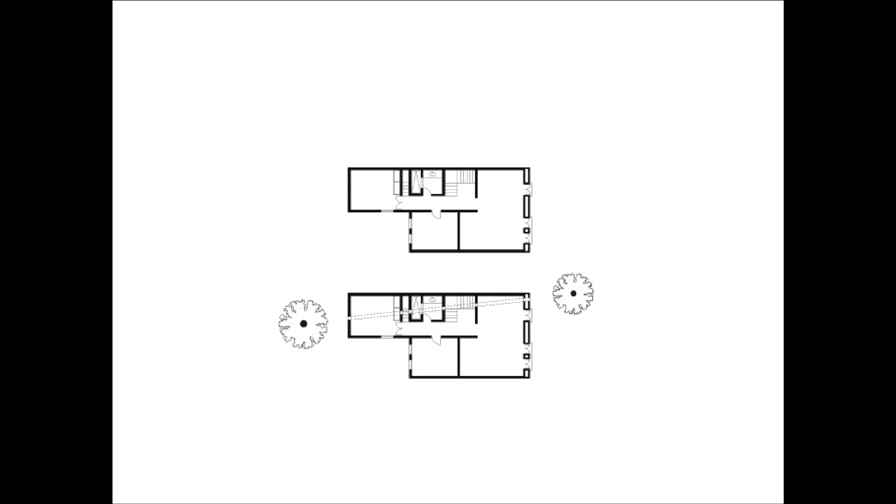In this case, we are showing you a piece Mauricio did several years ago. The intervention here was just this hole which crosses all the different walls along the house, meant to make a connection between two trees on different sides of the house.

What's interesting about this piece for us is that along this space there was a visual connection between one place and the other. For us, architecture has to do with voidness, maybe not doing a lot but taking away, and having a provocation behind that — in this case, along the journey of the exhibition, you could see people in other rooms.

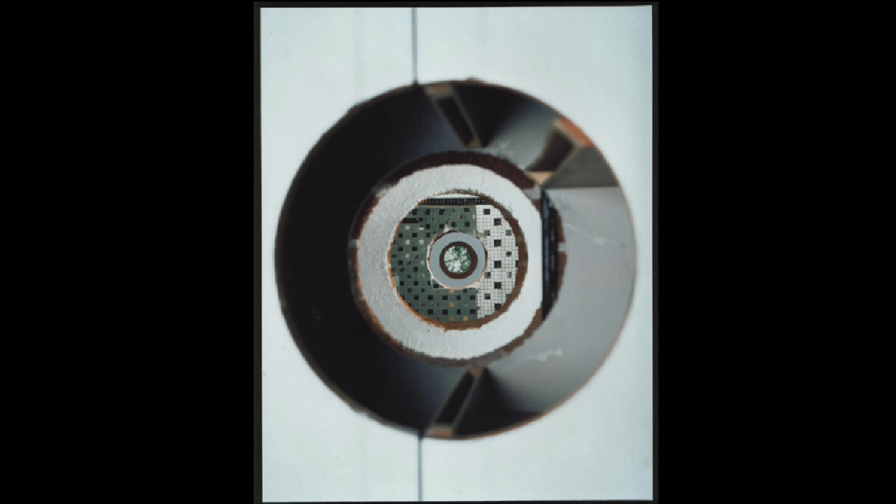You could see along these different spaces and then see the people again in a different situation. That was really interesting, because even a bathroom was part of this intention — you could go to the bathroom and no one could see you. The situation was a provocation through doing nothing.

So I think this is a very important theme in our work — doing this ephemeral work and then trying to connect it to the architectural theme.

We made a school for blind people, and it was a great opportunity to make something without view, to work with the other senses. We had to make a public school without much money, in a very poor area in Iztapalapa, Mexico City. We had land to build the school, but we had a problem.

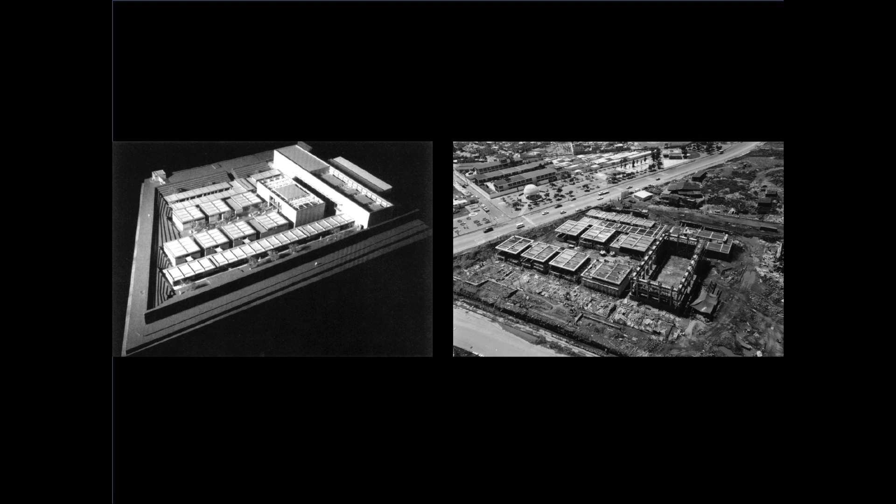We make a model with sentido común, with common sense—the way that blind people can really walk between many parts. I wanted to have some experience with you because when I made this school, when you see the model, you might say maybe it's not that nice. But when some blind people from Spain came to put some products for us for the school, he began with his finger, walking the model with his finger, and began to talk about the spaces, the volumes between the squares, the patios. That was nice for us because we said, okay, we are in the right direction.

We decided to use materials from the place: volcanic rocks and tepetate. Tepetate is some land that you can use like a brick, and it's not that expensive—the idea is how you can use it contemporarily. And then, because in Mexico we have a good climate, you can make patios, a big patio in the middle with a line of water and a library.

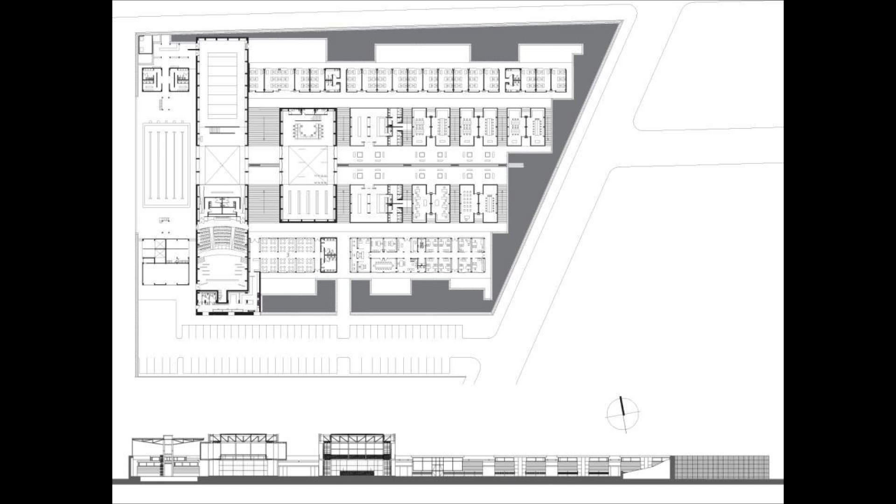Finally, we have the experience with touch, with the feeling of temperature, and that's why you see all these materials—concrete, tepetate, volcanic rocks—and how you begin to play with the height of the roofs. You have to know that all the blind people in Mexico are more or less visually able to sense light, so the light and shadows, everything is important to play with. We made this big square patio with the sound of water, with the shadows of the magnolias, thinking not only about the view, but more importantly about how you will feel in the place.

Because of that, we began to think: if we make a structure like these two buildings, you have a skeleton, 9 columns for each roof. Sometimes you have a skin of tepetate that makes all these workshops, because you don't need a window—so you only have a window at the top, and on the other side a big window because it's a mixed place, like the store of the place, the gallery, etc.

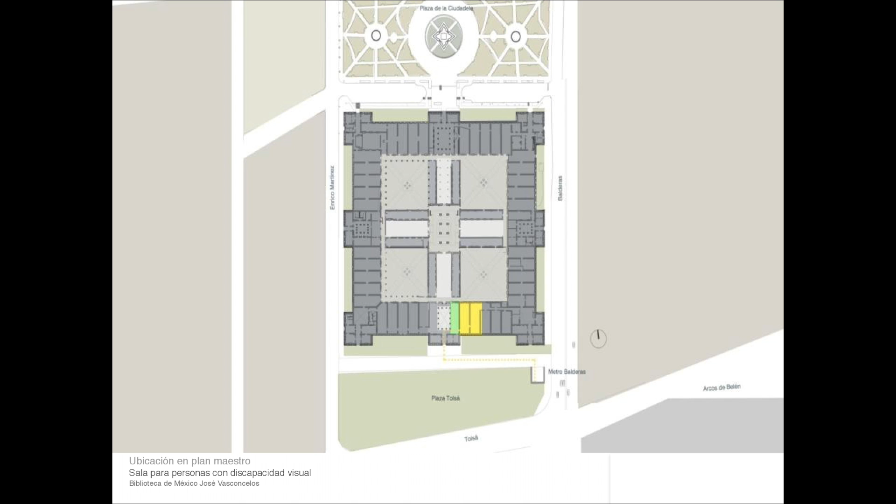Last year they invited us because of our experience working with a school for blind people, to work in this library. It was a big complex, once one of the biggest libraries in Mexico, and they gave us those yellow squares to work in. The building was old, and in Mexico City we work a lot with these old buildings, which are protected by an institution called INAH, so you can't touch those buildings.

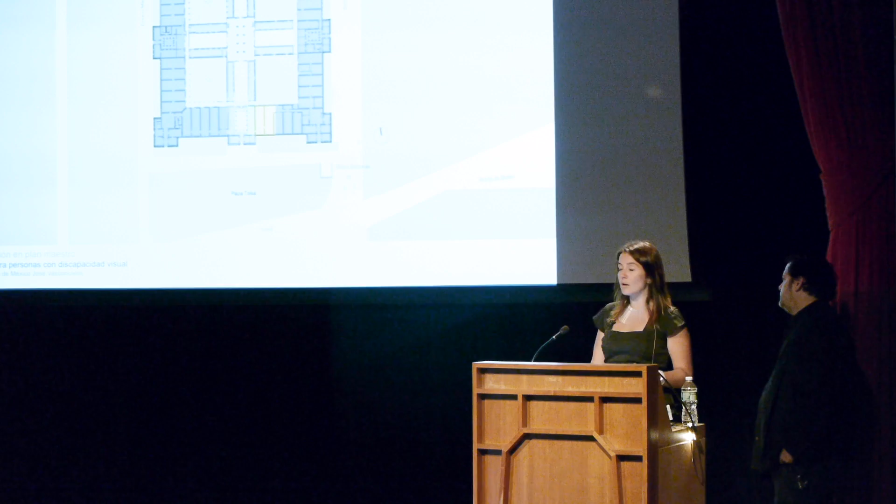What was interesting was that the invitation came because we already had experience working with the theme of blind people. When we found out how the library used to work, it was like a common space, similar to a regular library. In this case, what they asked us was a typical program of shelves, tables, and some small cabins for all the sounds produced in a library for blind people.

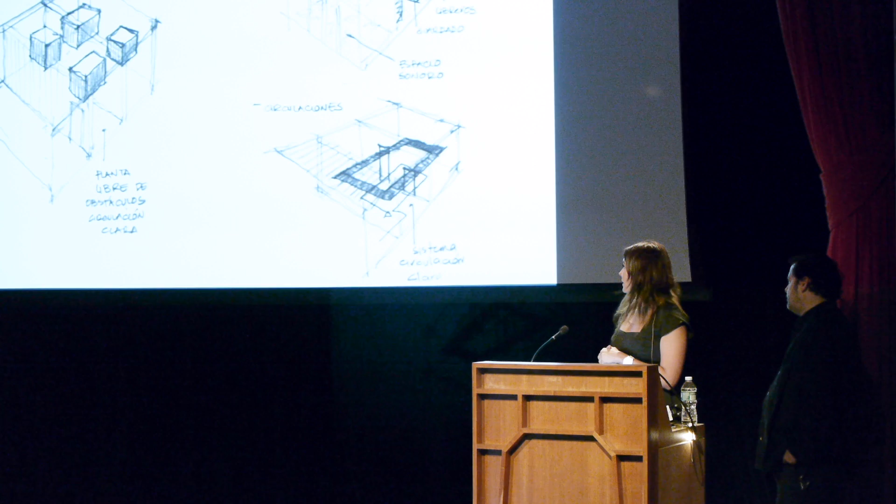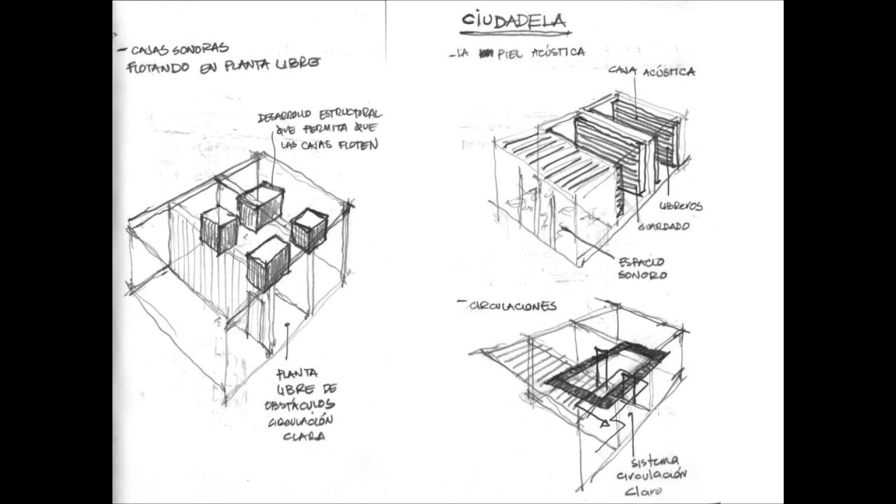What was really interesting in our concept, keeping up with this idea of voidness and working with all the senses, was that we worked with sound as the theme. So we created this big acoustic box, developed very clear circulations, and achieved a clear area on the first floor, then kept the biggest, noisiest sounds in small boxes floating inside, taking advantage of the big height of this old building.

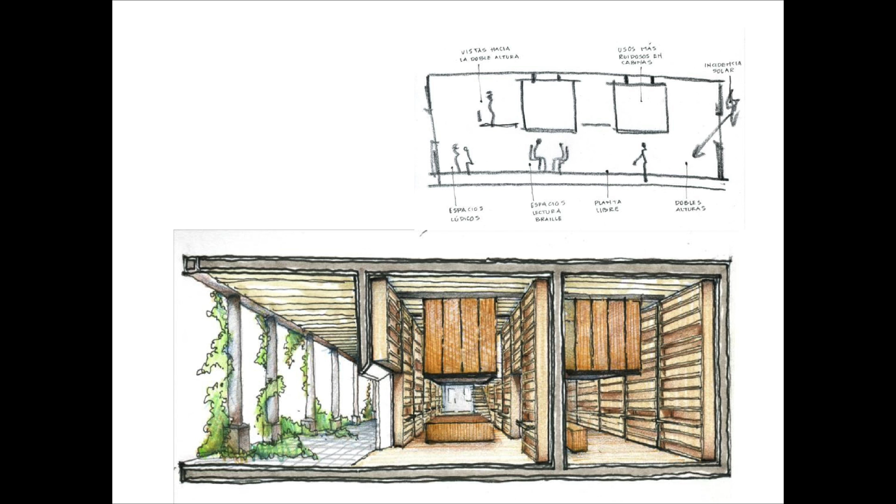We again took advantage of a nice portico in the building and tried to work with the smell of plants, creating part of the program that wasn't originally in scope — a big site to keep all the files safe. In Mexico, jobs are very badly paid, so they have a lot of people reading the same book many times, instead of having this big archive where they can save it and use it until the end.

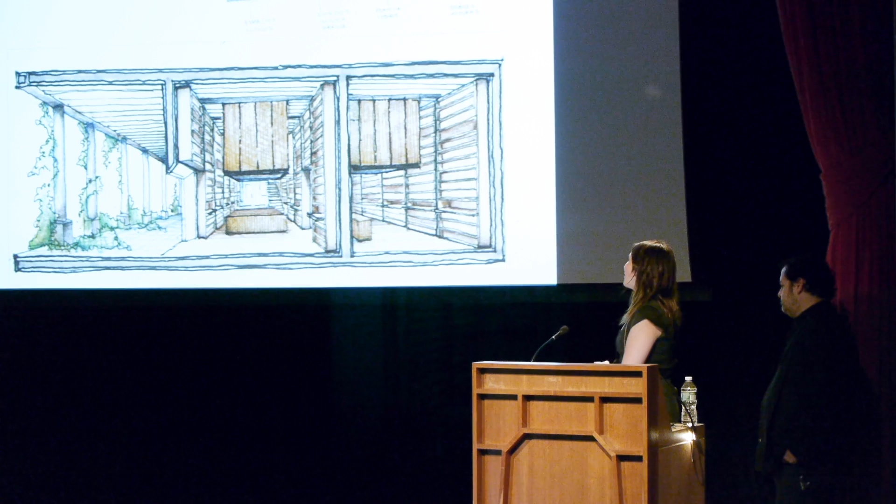So we have these three different spaces. First of all, we worked with the smells — in this case we have a nice garden. Nowadays it's used in different ways: they have lunch there, do tai chi, play chess. We designed it so you can be near the smells, as the first point of being and feeling part of this new experience of the senses.

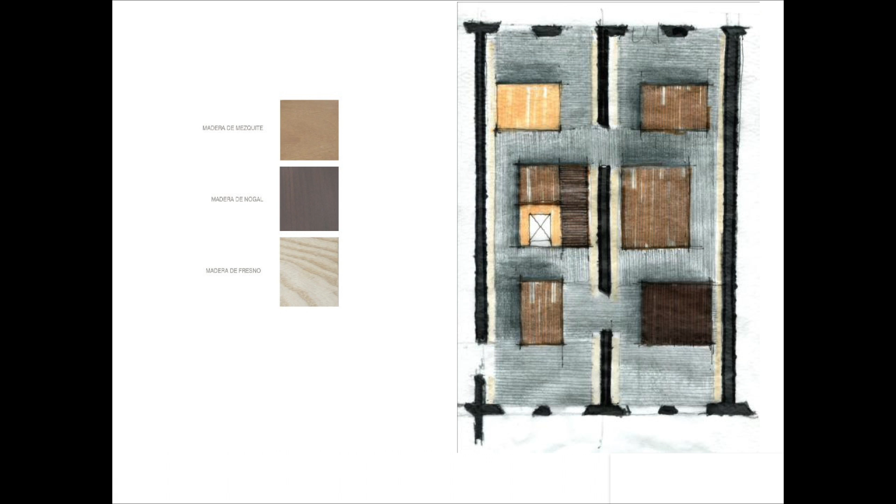Then you get inside the library, and there's this kids area, which wasn't there in the beginning. Here you can see the boxes floating over this area. We also decided to create different textures with colors in different woods, so each color shows you, and the drawing on the floors shows you where to walk and where to work.

One of the colors best seen by blind people is yellow, so we used yellow everywhere. We also put different signals in Braille language, with texts from books talking about senses. Here's one of the rugs, which was also yellow. We designed all the furniture with an industrial designer, and everything was conceived especially for this experience of hearing.

This place was all open, with no walls, and we designed a very sophisticated sound system so you can hear no further than a meter, and in different places, as you keep walking you discover different sounds — the architecture was part of that. We designed different levels in the ceiling so they could also be a reference point for blind people.

Here you can see the interior of these cabins with very sophisticated equipment. This is a drawing we did because we invited some artists to work with sound, and they created pieces especially for this space. What's most interesting about this space is that it's a common place for people who can see and who cannot.

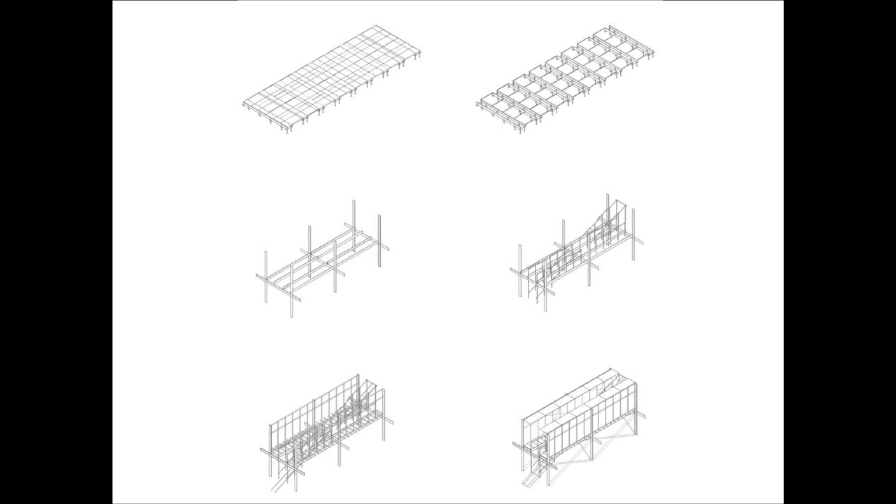This is another intervention in a historical place too. They invited me as an artist just to make something, because they wanted to redo the floor, since this church has issues from the lagoon problem in the center of Mexico. So we counted all the materials we had available, just to know what we had — we didn't have money, just the workers of the place, and with that, in two weeks, figured out what we could do.

I saw before in that place many pieces of art with problems with the scale of the church. So what we did is make a space into the space, working with a structural engineer, using only 6 columns to create a place where 70 people can be inside, having a new experience, and even some artists can make something inside our piece.

As Mauricio said, we are very interested in working with the skull and at the same time with the skin. That's why this is like the reference of how we first worked in an ephemeral work, as the one we've shown, and in this case with a public warehouse we need to do in Milpa Alta, which is very near the heart of Mexico City.

And the way we found the place was all of this. All these constructions which keep on being created, and we have these nice tones, and we plan to work with that material.

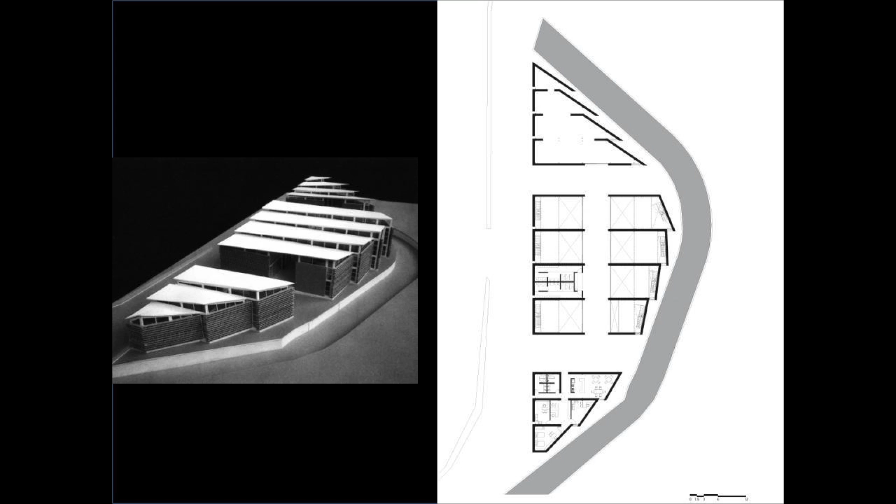Our site was very special because it was like a kind of river around our site. So we designed this building thinking all the time about showing, using very cheap material, which will be this very thin skull of steel with very light ceilings.

At the same time these stones, which will be the scheme of our project. We love this kind of picture, because our user, the one who uses this space, is all these materials which they put all over around.

This building was intelligently designed because all the windows are open to the north, which is very good orientation in our city, so you won't have a hot climate. And as our views needed to be controlled, we opened these little lines.

We like to show this because it's the way public buildings work. At the end, the light is very good, and the natural ventilation functions pretty well.

I think this is one of the most important images of what we think of architecture — this theme of the skull, and at the same time the very light material, but at the same time the skin, which seems to be very strong. The light, the different heights, and that game with the space is what we want to achieve in every one of our projects.

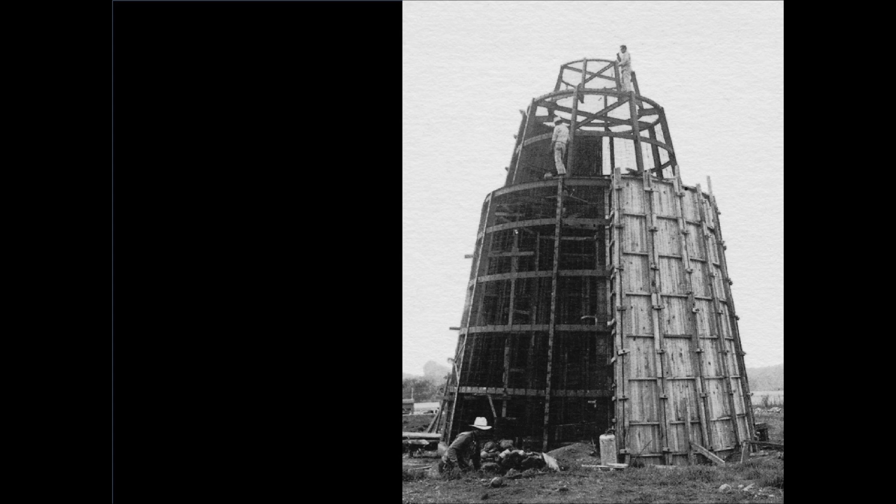In this case, another intervention is in the sculptures we made for the Olympic Games in '68. They invited sculptors from many other countries. This was Fonseca from Uruguay, and what I liked about the photography is how he made his sculpture with all these woods.

So we said, well, we can use all this material to make something — not just a sculpture, but at the same time a big stair that the people can just walk inside the place.

The nice thing about this piece is making a concept, a strategy, because in this case we had the model, we had two workers, and said we need to make this thing inside. But we couldn't cut the pieces because a construction company gave them to us for two months. So we said, okay, don't cut the pieces, but we have to make this.

So in 2 weeks, once more, we made all these stairs, and the final decision was left for the workers. What's nice is that it was very strong, the lines of what was happening there — to understand that the details are more about how you use the material, the time, the money, and the circumstances.

Again, with this connection of the ephemeral with the architecture, we designed a market, also near Mexico City, and it was again a strategy. It was very easy to see how the markets work, with this common sense, how they function with light and with wind, and they're very clean all the time because they feel good.

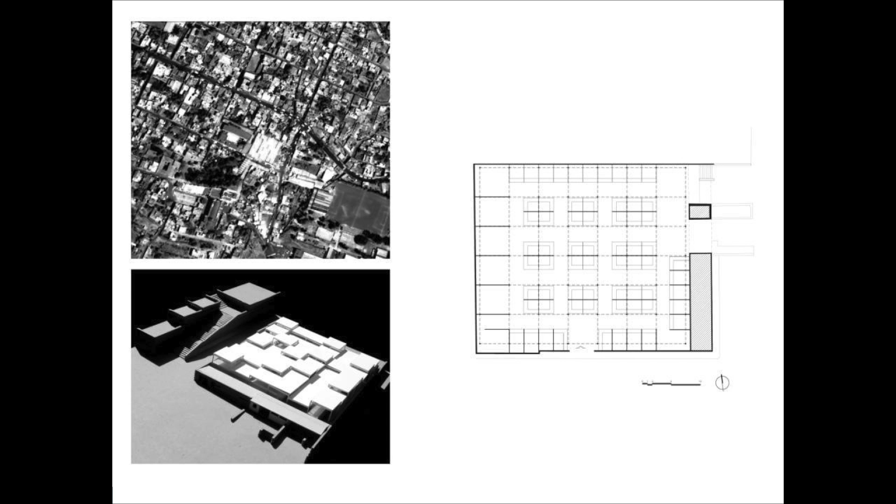And it's using that common sense that we decided to create this grid and work again with randomness, and play with a strategy to create these ceilings at different levels. Every time we placed a piece, we imagined, depending on the orientation, using louvers or crystals.

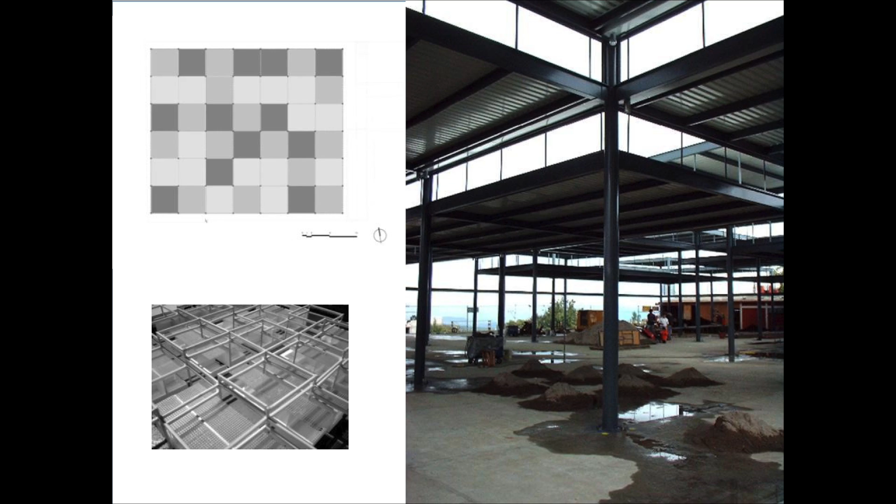So it was meant to be very monochromatic, very clean, taking advantage of the natural life of a market, letting users make it their own and take advantage of the color of the tomatoes and the piñatas. What persists in all these images is the light, and at the same time the dialogue with the city, with the volcanoes, with what happens in our country a lot, this growing of cities without any order.

The idea is, if you have it in a marginal zone, we love these informal houses and cities where everybody's changing the houses every time. They move and change and make other floors, everything is changed. So if we make a contemporary piece there, we try to make something in the same rhythm, so the facade works with what is happening in the whole town, and we want to work outside and inside the same way.

All the products, all the people changing every time, so that's why we try to make it like a tianguis, these street markets we see in all the countries. And what we can do now is just have the wind cross and have the light only in the north and in the east.

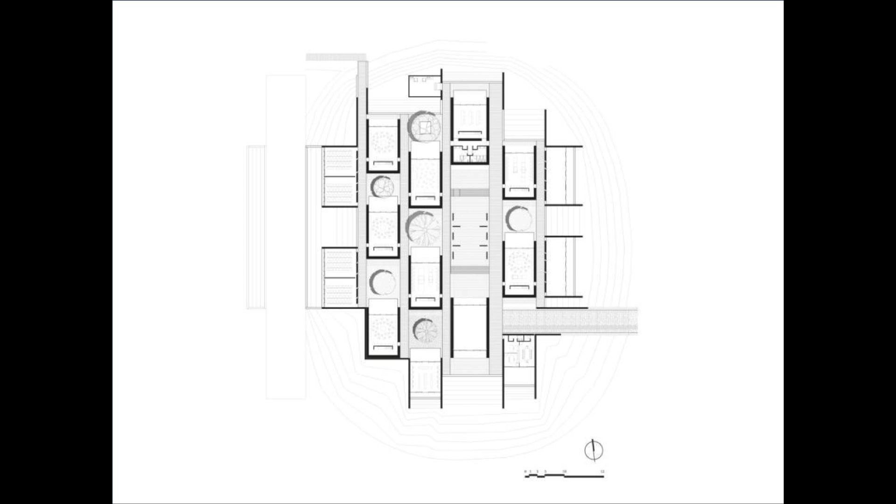And all this in the program we found, if we have like a chess, like a table chess, the blacks are the studios, the whites are the patios, and then how can you make a double space? Because in Mexico we have very good climate, so what can we have in the same space, so that all the sculptures, drawings, whatever you have in the program, can have their own spaces inside and outside? What's very important for us in architecture is that the spaces we create should be discovered at the same time.

The timeline, you walk through the space and discover every space should be very important. In this case, the chess plan helped us discover every courtyard we created, and as Mauricio said, to get a bigger studio but with less money, because half of it will not have a ceiling.

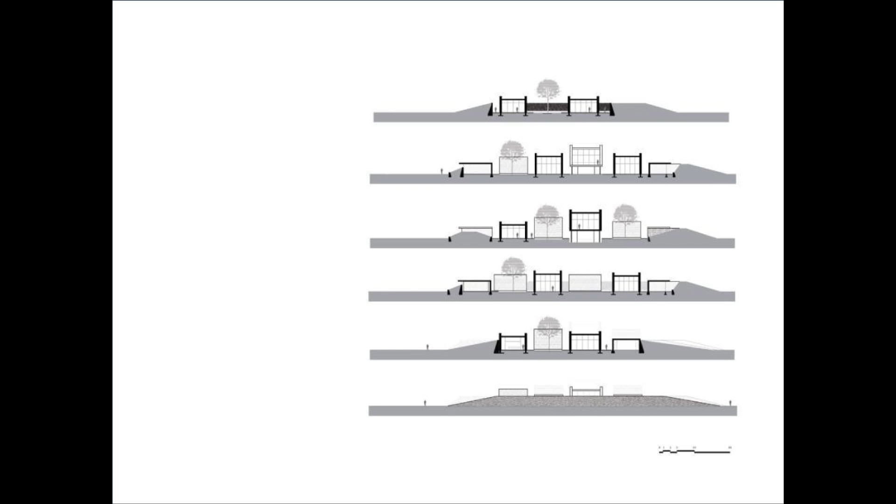I think what this project shows is that the chess plan helps us move through the place in different ways. Also, the program is very flexible, so you can walk through the studios without them being a closed classroom, and that helped. We also wanted to work with this curve form so you can start to discover the different heights of the buildings, and every studio has its own different height between one and the other, depending on the program.

So here we can go image by image, how we came with the earth, how we can make some stones with the earth and the humidity, and then in the middle, these earth walls that we made in all these buildings. Even because we don't have all the money, it's a way that if we have different places to work at the same time—first, because we had to make this school in one year, and on the other hand, because they needed to go up for the money. So they began with 3 buildings, and then the people said, okay good, then you can have all the money.

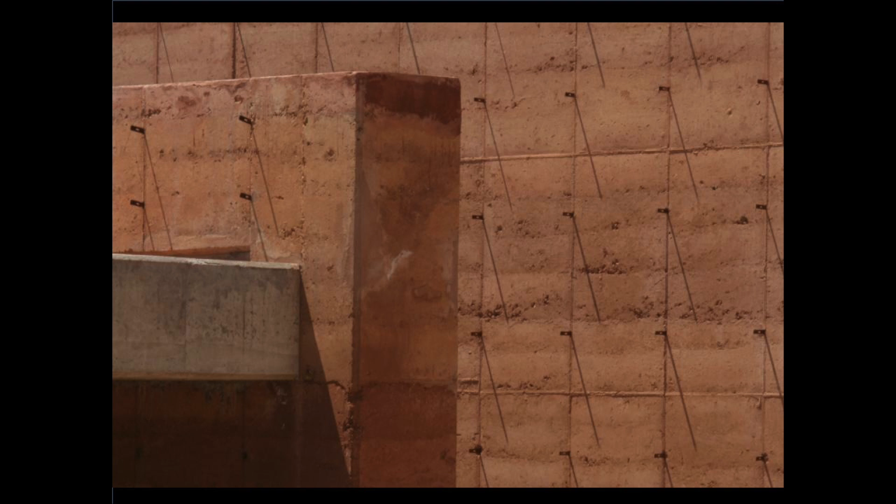So how can, with architecture, we help the client get what they want? Again, it was a strategy to achieve all this site and make it part of our project, and without, as Mauricio said, having all the money, which we achieved at the end, but not all.

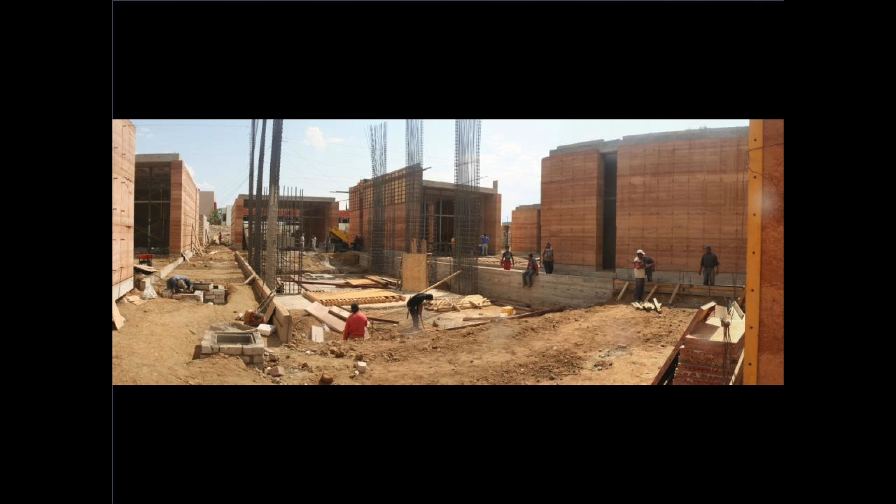We have 2 different stages instead of the 3 that we designed, and here is part of the progress of building one of these. What I like about this building is that we made walls of rammed earth going to the other side—talking about gravity and how we can do, one more time, things with the same materials, which is heavy, but at the same time we make a kind of deconstruction to do it in another way.

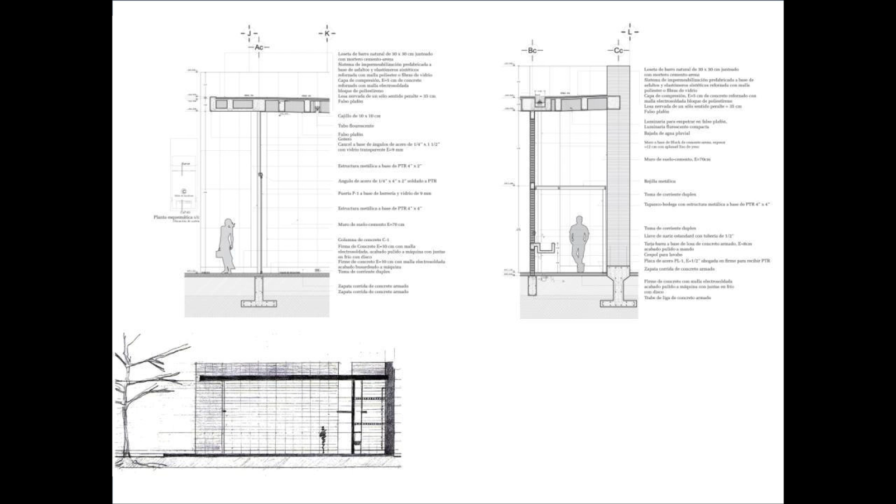You can see boxes, but finally we are not working with boxes, we are working with planes, vertical and horizontal planes. And then with columns of concrete, we do almost everything in rammed earth, even though it's a very earthquake-prone zone.

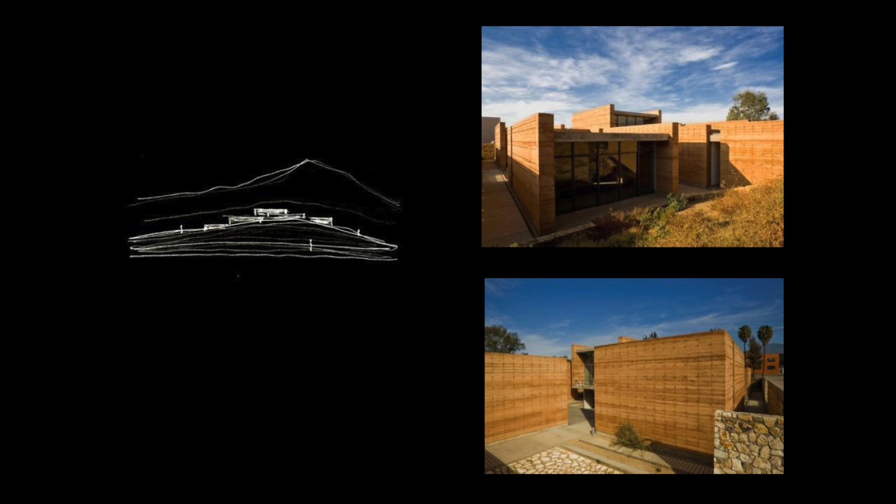And then finally, the more important thing is the experience—how you can be in the place, how the shadow is important, how the relation with the light and the material is important, the tectonic thing in the place. We love the idea of all the people walking in all these gardens and having different views of the place.

Everything is oriented to the north—all the buildings face north and south, but almost everything faces north. And as I say, in Oaxaca you have these beautiful blue skies, a very strong and dramatic light and shadow, and it's just like that. You go patio by patio, workshop by workshop, and find all these different relations with the volumes, and the places.

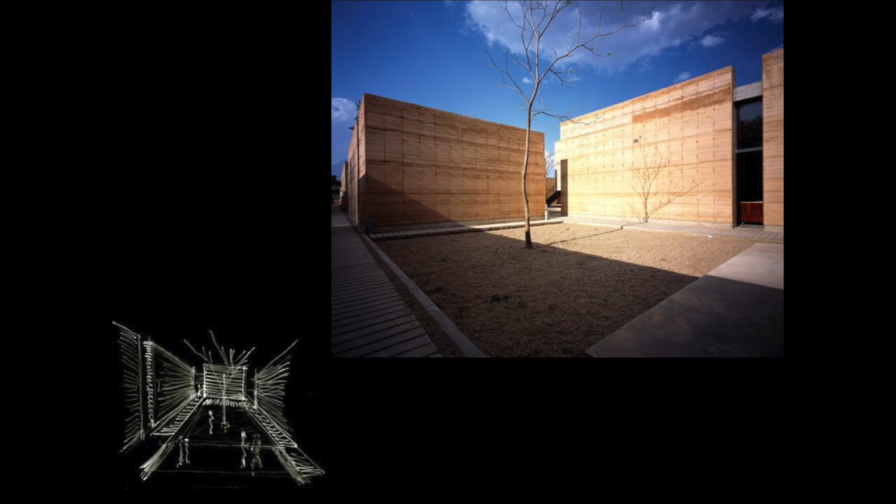Yes, and something very important is this idea of discovering. As you can see, some pictures are taken from the gardens, so the way you see the buildings is very different in different circumstances. I think that's the theme of this building, and what we want to achieve in most of our work—again exploring the texture, exploring the light, the shadows.

Of course, the relationship between the landscape, without a very clear idea of what's landscape and what's architecture. This image for us is very important too, because here you can see these vertical and horizontal planes, and how only with these planes you have this structural thing that helps you, but finally you can make the open space work better—it's like an open book, because we think we can even go with this material to more things, with other levels.

And this material has a great virtue, which is that it creates a perfect climate inside the studios. And since it's a public building, the idea of not having air conditioning was very good for the maintenance of the building.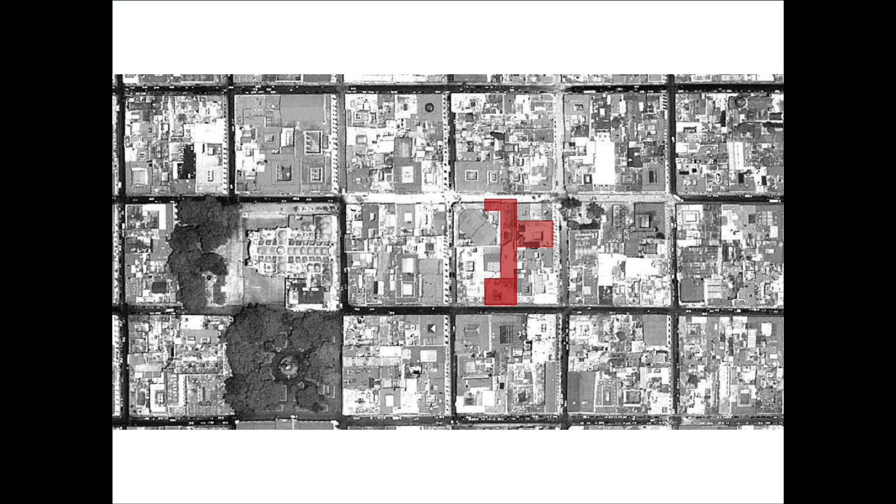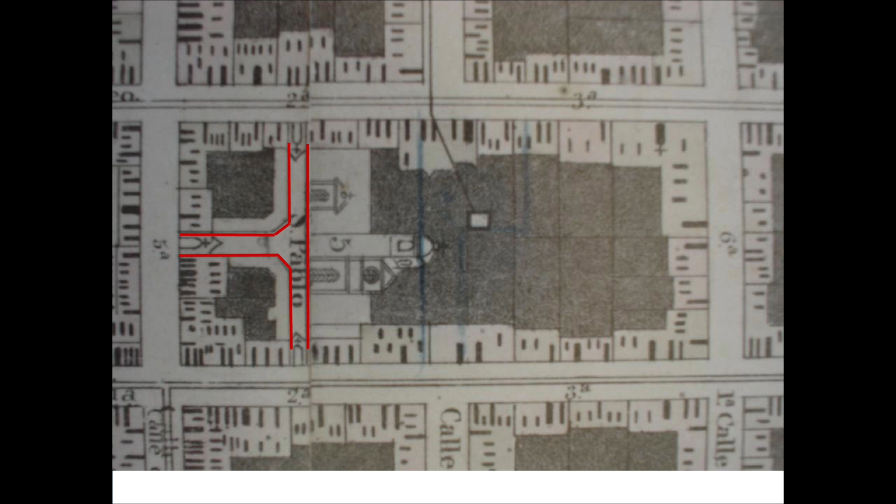Well, this is one of the last projects we have in our studio, and a very important work, because we found a convent of 17th century, 2 blocks from the center of historical Oaxaca. Our client found that they had a convento, but with all this construction nobody could see it. So finally, with an interdisciplinary group, we found that this was a hotel, though this is not the real thing about the convent. Then we found that there was an old convent, and we began to uncover many constructions.

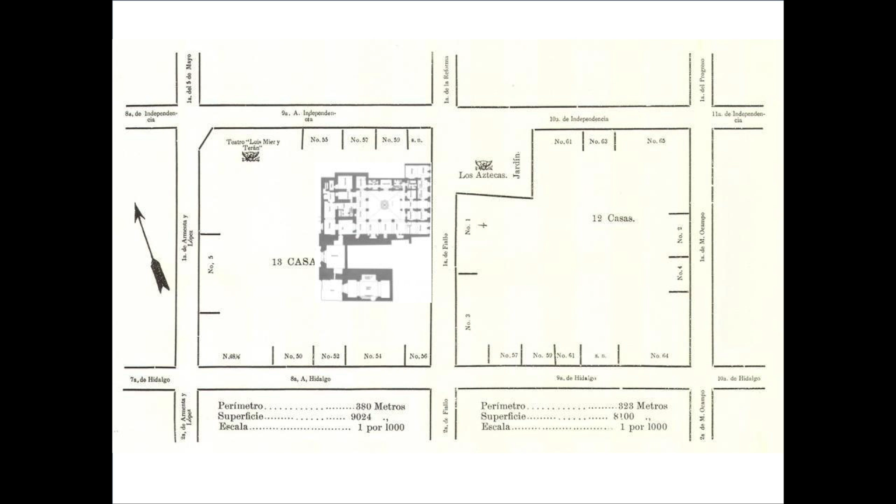What is nice or difficult about this project is that the client began to acquire many properties, but not all at the first moment. They would say, we get this one, that one. So it was a process, because we began working on our master plan even while we were making the building. Finally, we worked with this idea of having one more time the facade and the convent.

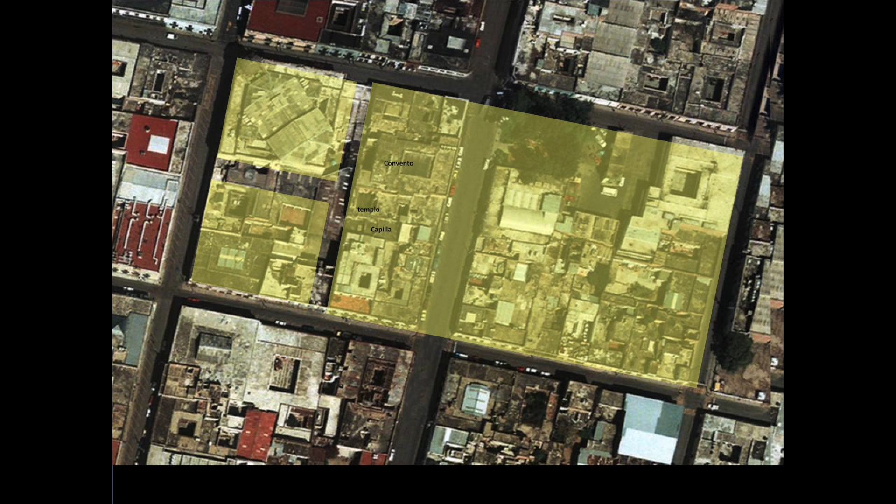Here we can see how the block was, and where this old temple and convent was, and how, in a period of Mexican history, all the churches and convents were broken apart. In this case, it happened the same. So when we found this site, it was a parking lot. And here you can see, in the middle of nowhere, part of the church.

And all these, as Mauricio said, our clients started to buy the different areas which were already broken apart, where the owners were all different. During this process, it was a very important, very long working process. Through 5 years, we kept working with an interdisciplinary team, and we could achieve several things.

First of all, to recover the street in the middle, in the heart of this block, and with that open it, even though our client is not the government, it's a private client, and still we could recover this street, which nowadays is a public space open to all the people, with a lot of cultural and very nice activities for children and for old people as well.

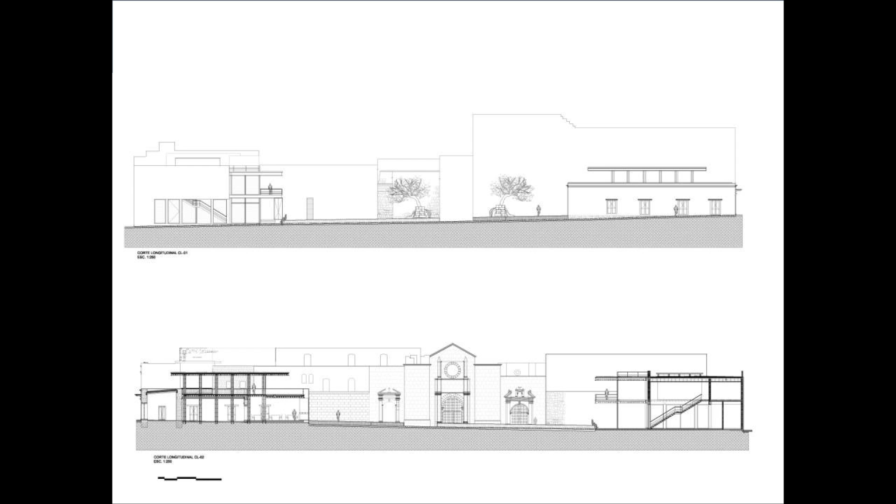And then as he could buy these different areas, we could achieve this street and start to create a program with restaurants, some galleries, the offices of our clients. What is nice in this is, in different cases, we have houses from the 18th century, we have other houses from the 20th century, and we have the convent from the 17th century.

So we decided that the contemporary intervention is like acupuncture with steel and wood that makes all these pavilions, creating the program and changing it to recognize the different ages. I mean, it's not only important that it's the 17th century, it's about making a complex thing in the history of Oaxaca. So that's what this is.

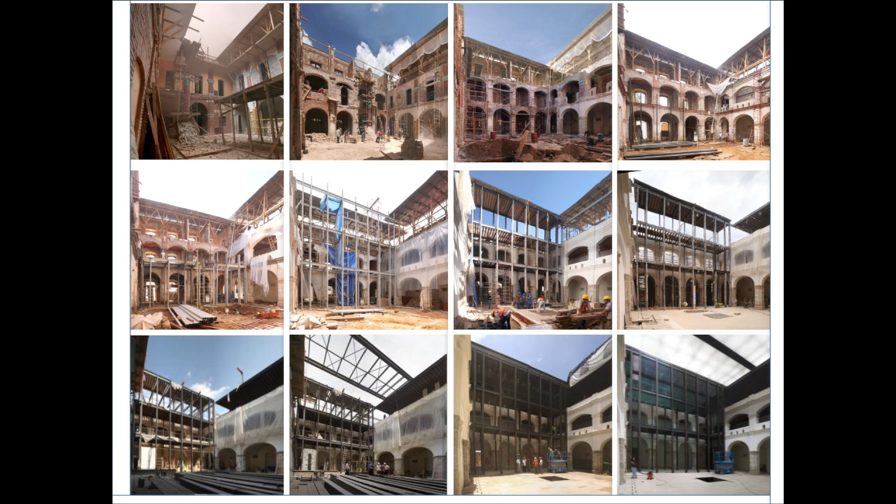Before we planted some trees, but now it's the place of the public space. Now it's wonderful, used by all the people in Oaxaca, and then we began to make all these patios. And this is the process of how we laid out all the hotel and construction.

And then the client said, okay, I've cleared away everything here, but now tell me how I can have the same square meters. That's why we decided to make this very invisible and not-invisible pavilion, to understand we are part of the play, but at the same time we want to see all the building. It's like a complicity, no?

So here, and I love these photographs, we are on one side and on the other side, all like this intersection of the new contemporary and the old building.

Or in this case, we have 2 levels with the hotel, and they said we need the 3rd level, so we decided not to put columns, to use the technology and make these light roofs, like porticos on the top of the building.

And here, because they broke part of the convent, we needed to use the place to make the library, and that's why this new element helps to make this transition to the place, to make the program.

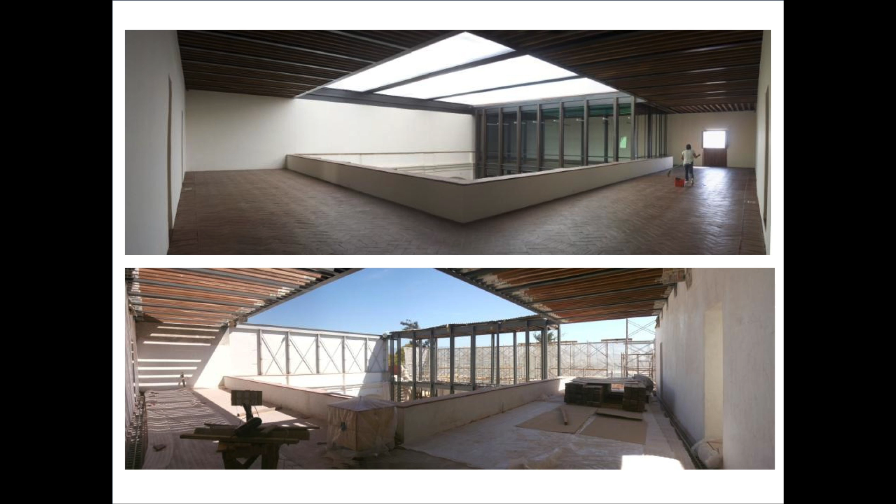We use one more time—it's a nice time of year with a lot of rain—so we can use three parts that move with electricity, allowing one side to keep the rain out, but on the other side, how do you keep the sun from reaching this pavilion? We wanted to give importance to the old building and keep it visible, never putting shades in front of it. So we put it in a horizontal way, which also helps support different activities in this patio.

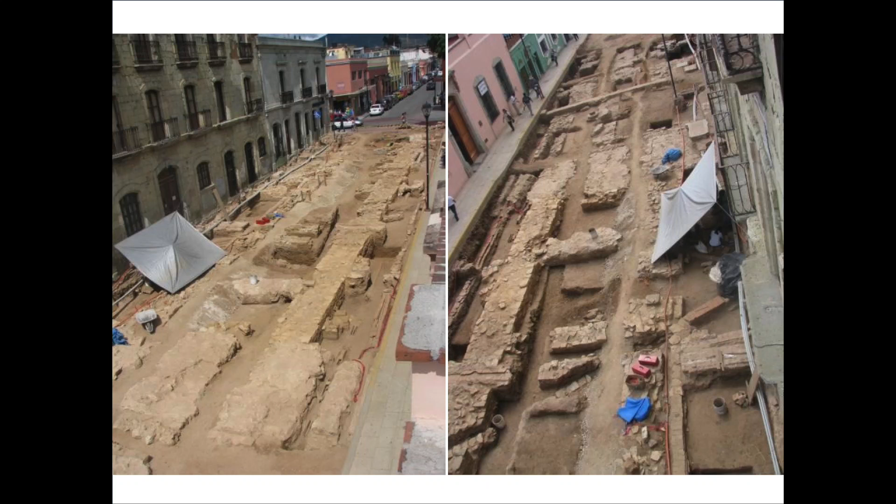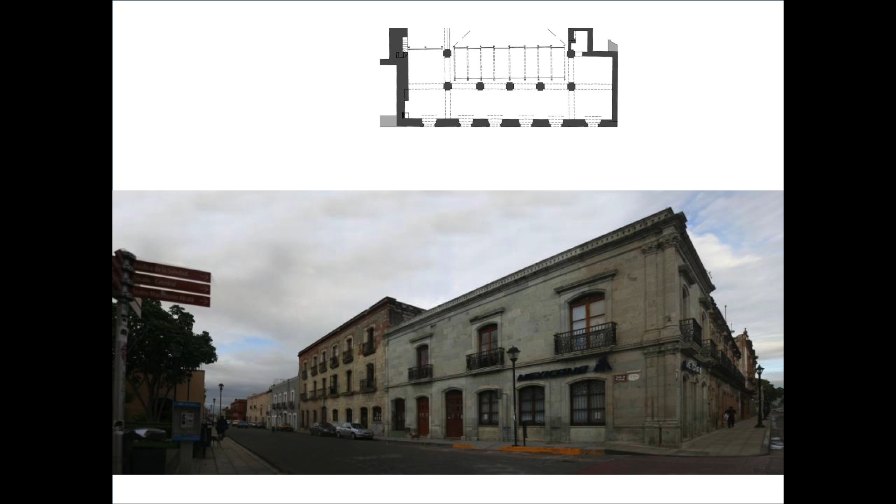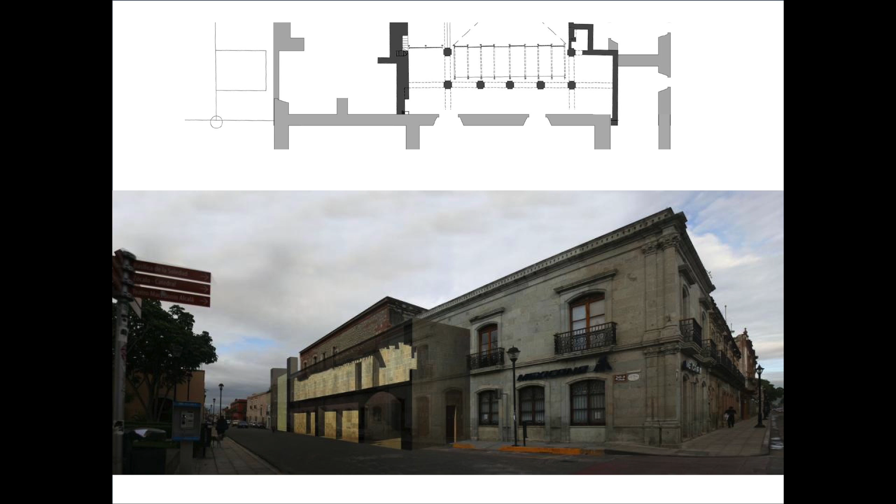This was kind of a tragedy working with INAH, the institution, to show them that the original facade of the building was not the one that was built, and to start cutting the building as the street cut it, finally arriving at the original facade of the old convent. Well, more than the original, it's like a cut of the building. So if we no longer have this hotel, we don't need the 19th century facade of the hotel—we need to cut to the memory of the convent.

Our clients said, come on, why would you remove this beautiful 19th century facade? And we said, no, you really have to preserve the memory of the building. And if we decide to make the facade inside, we need to not be schizophrenic—psycho—because you need people to understand it.

We worked again with the idea of a middle ground between the portico and the rooms, making it very abstract because it's in dialogue with the abstract convents of 17th century Mexico. On the other hand, we had to change all these facades to be simpler, less protagonic.

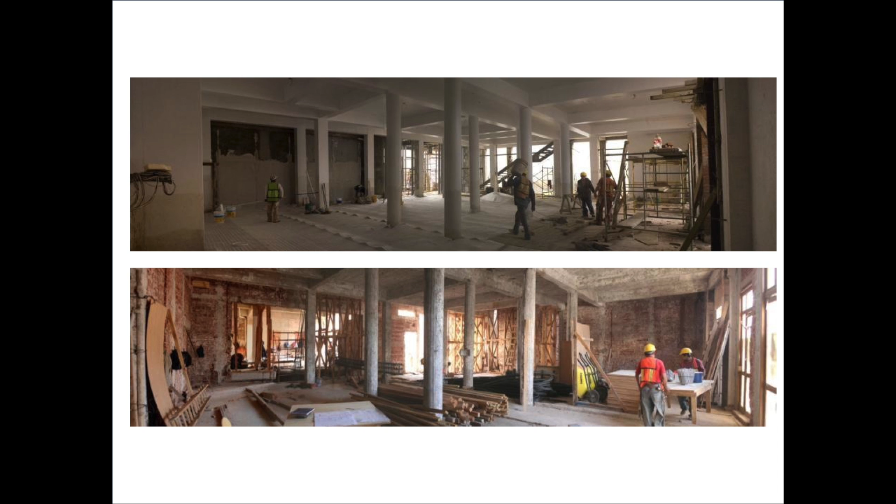This part is 20th century, and we found a beautiful structure. We cleared everything away and found a nice place for a gallery, then opened up the space for new patios inside. We made a pavilion in the north that connects the 20th century structure with the new program of patios—there you can see the different things you can do inside.

On the other side, we have a house. We couldn't add another level, so we decided to make a roof—a contemporary roof that you can really see, but we made sure you couldn't see it from outside. Then there's the construction of the 18th century house, converted into a restaurant, with porticos providing shade around the patios.

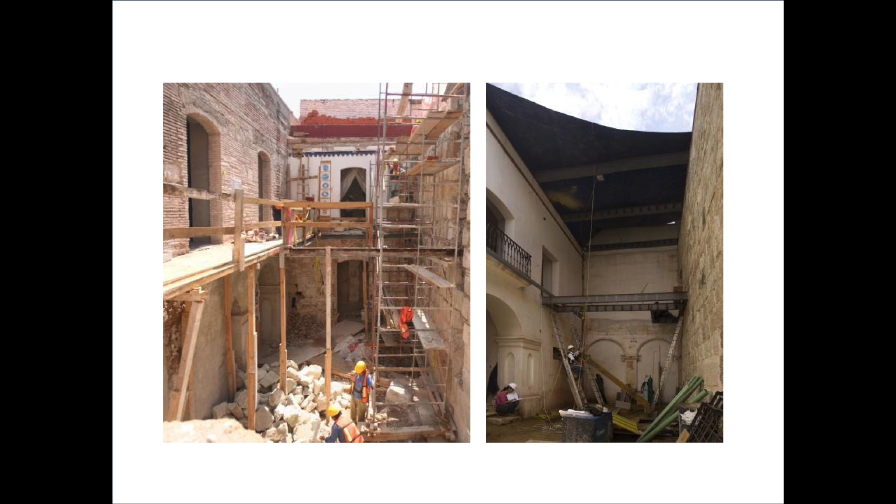At the intersection between the convent and other 19th century buildings, we removed part of the house to expose the back of the convent, creating this acupuncture-like connection with contemporary architecture.

I love this photograph because we made a very important restoration of the building, but at the same time we recognize the intervention. This is important in Mexico because in historical centers like this, nobody usually lets you do that, and we worked hard to achieve it.

We were more like lawyers than architects. Yeah, we had to work with that—a lot of work dealing with people. This is the way it functions nowadays, with different programs and different activities all the time.

It's really nice—the sound pavilion is like an artist's architecture project they invited us to do. They invite artists to create something for a museum that Legorreta made, and they asked me and my brother, who is a sound artist, to create something, inviting us to another place to make a pavilion.

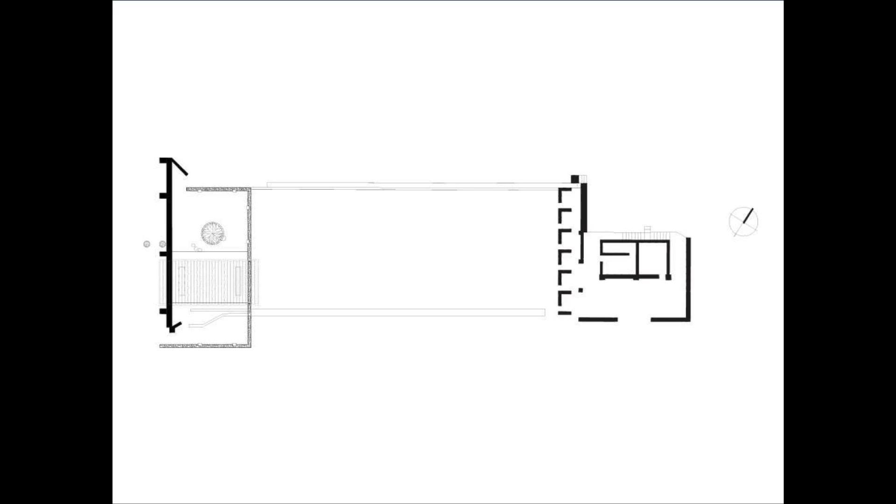And we decided that's not good, and we decided this place has a tree, a pre-existing wall, and two stones. So finally, one more time—when they say a pavilion, you think of something because it's a place of art.

We were thinking something more arty. But finally, we said no. We have to make some walls, just to make a horizontal top and a vertical wall, just to make a space—even if people don't recognize it as a new place, but more like a strong pre-existing garden.

So finally, with all these details of the concrete, these stones we made look good, recognizing how the farmers make these walls without cement. And finally you go inside, you have these roofs, this shadow, a place to be, a think tank, just to look at the tree, to look at the stones, with this very clear relation between the new and the old walls.

And finally, because this was a former place for the military, we decided to leave these holes to remind us of the bullets—the firing range. But now, just to look outside, to look at the landscape, for the children or for the adults.

We wanted to finish with this type of project because it has a very non-program—the program was just to go around and to hear. My brother developed a very nice piece with different birds of the area. Two elements, just trying to achieve, at a different scale, the shadows of this tree, and again the stones which we found, the earth as it was, and the old wall as we found it.

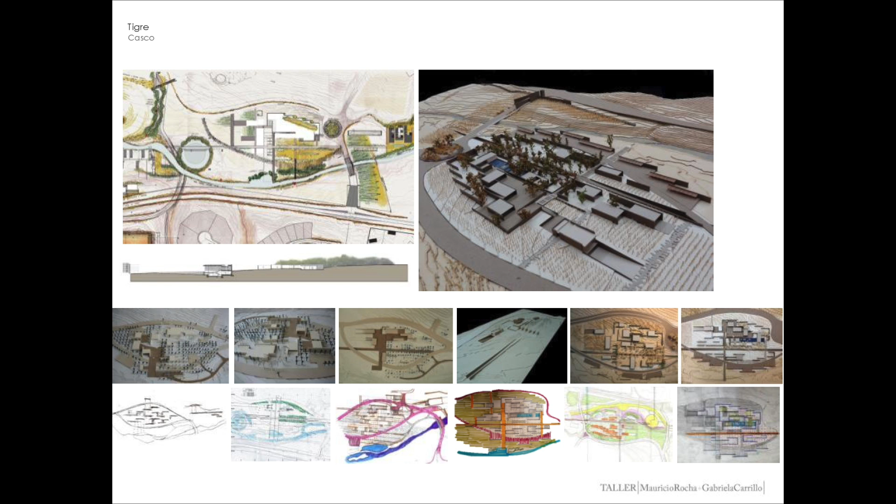As part of this complementary set of projects we were talking about, our last project, which is being done right now, has this same theme of doing almost nothing, but taking a lot of advantage of the site itself and working with these beautiful landscapes. We are working on a very long process project—we've been working on it for 6 years, but we will keep working on it for 20 years if our client keeps us.

And we designed a winery here—a little winery. They said we only need a room because we'll make a big winery later, but let us make some room. And we said, no, it's an opportunity, let's make something there. And with the temperature, there's something we put in the place—it's the beginning of what we are thinking finally for the new constructions.

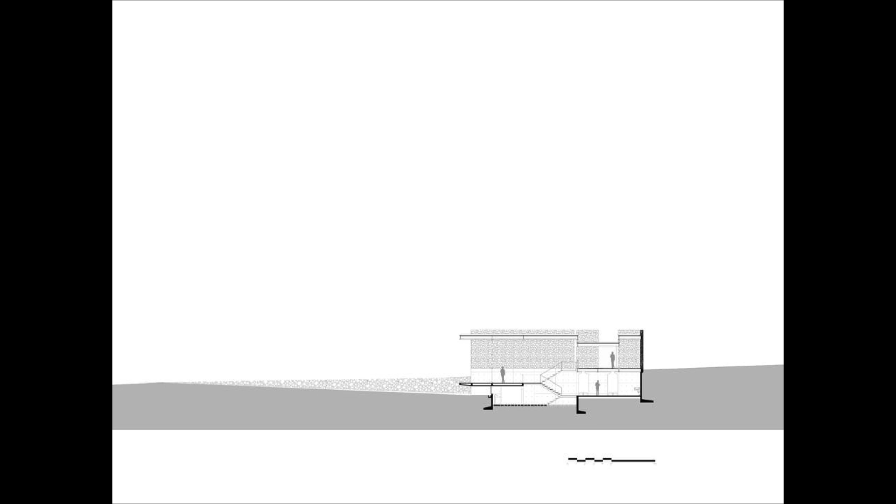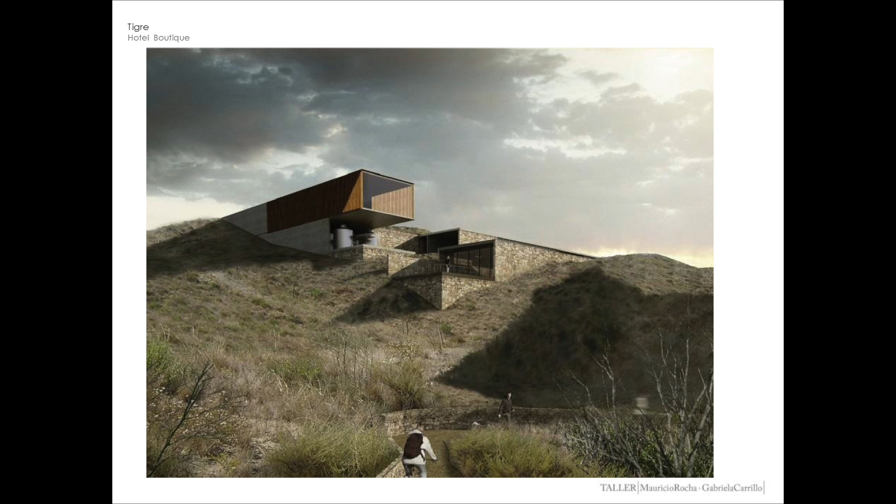But at the end, what we wanted to show you is this relationship again with the landscape, in different types of projects we've been doing, and how we want to have this dialogue with the topography, with the light, with the shadow, with the mountain, with the vegetation, in very different programs.

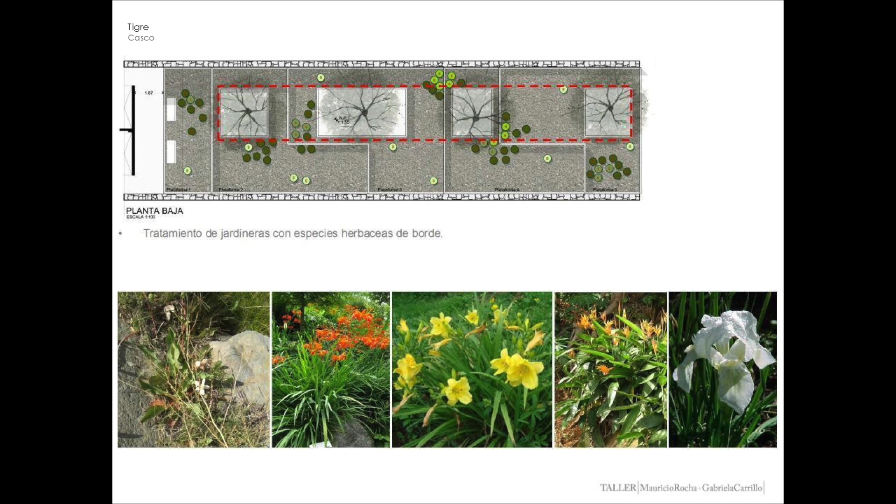As an example, the last one we did was these bathrooms—a simple program, some bathrooms—working with the pre-existing walls, the pre-existing buildings, and the trees that were in the area. We designed this type of sand garden with a waiting area for the bathroom zone, creating again a landscape. That's what we think is very important for us: to create space with all these elements that are unique to this site.

And we created this whole program with fountains and water, just for going to the bathroom.

Finally, what we want to say is, with different materials, it depends on the zone, depends on the money, depends on the scale—we don't care if it's a little thing or a big thing. It's about ethics, it's about politics, it's about how you can work. Here we are very close to the United States, so we can use wood because there are good wood products in California. But at the same time, we brought workers from Toluca in central Mexico to make stone walls, because we know stone walls are very expensive in this zone of America, but in Mexico it's easy to do.

So take the opportunities, understand the climate, the place, and then make something—spaces for the people. Everywhere, every part, the people will live there. That is the important thing. Thank you very much.